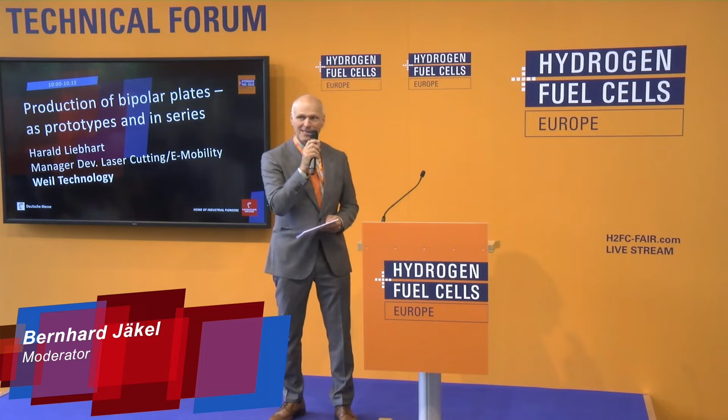And we have a whole bunch of interesting cutting-edge presentations of the newest technology. And today, the first speaker will talk about the production of bipolar plates as prototypes and in series. He's manager of development, laser cutting, and e-mobility. Please welcome with a great applause, Harald Liebhart.

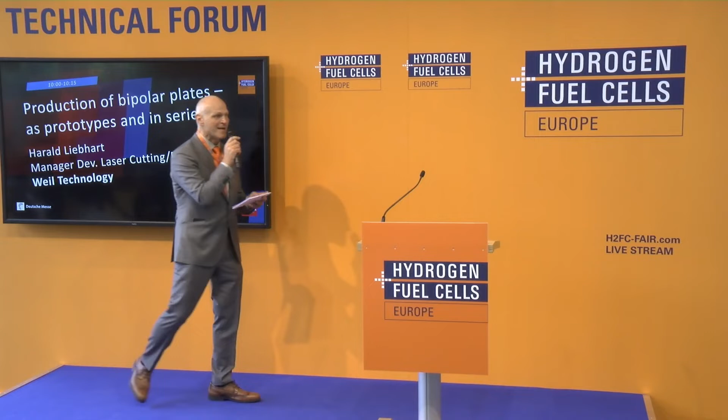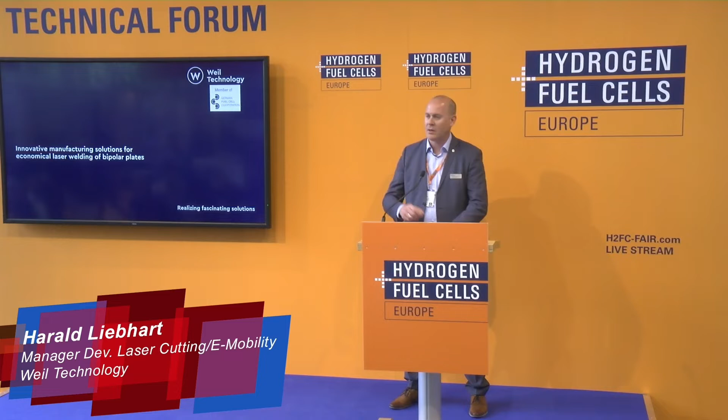Morning. So, hello and welcome also from my side to today's presentation of a manufacturing solution for metallic bipolar plates welding. My name is Harald Liebhart. I'm at Weil Technology responsible for development of laser cutting technology and e-mobility products.

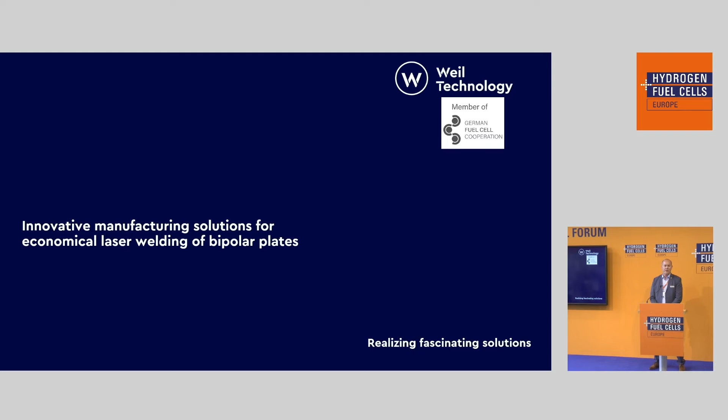Let me shortly introduce you the company Weil Technology. We are a family-run company founded in 1987 by our CEO, Mr. Wolfgang Weil. We are located in Mülheim, in the very south of Germany, about 40 kilometers south of Freiburg. We have two offices, one in Detroit and one in Shanghai, both with sales and service departments. And we have a daughter company, Schal Technology, which provides the servo press technology for us. This is located close to Stuttgart.

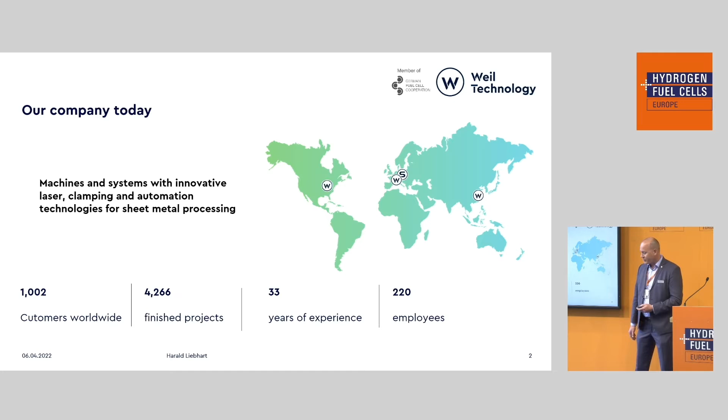With about 220 employees, we have about 1,000 customers worldwide and more than 4,000 machine installations. So, in summary, we have more than 30 years experience in laser processing technology, especially in laser welding and laser cutting technologies. Today, we want to talk about the solution for laser welding of metallic bipolar plates. And here we are in cooperation with the companies Von Ardenne and Zeltwanger as a member of the German Fuel Cell Cooperation.

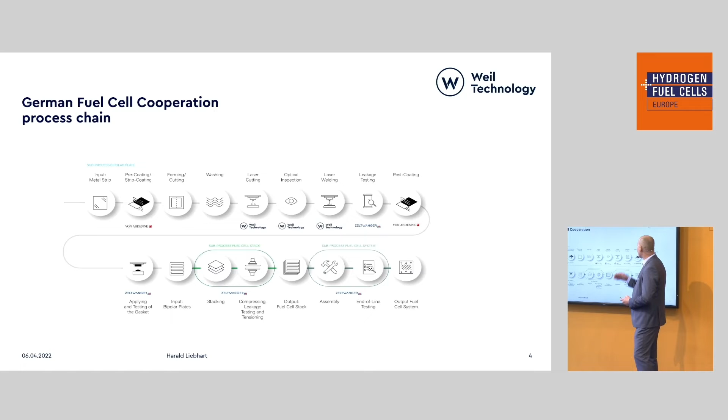Shown here on the slide is the complete process chain provided by the German Fuel Cell Cooperation. All companies with their core competence inside, with their modules, and we are located here mainly with the laser cutting technology and the laser welding technology. Today we want to talk about the laser welding. We at Weil Technology started early research on welding technology for metallic bipolar plates already in 2018, at that time with Cartesian guided optics, which changed, due to the high output needs of today's production lines, to remote welding technology.

So today we're talking about welding speeds of 1,000 millimeters per second, which is required for the output of such a production line. And as you can see in the diagram, a spot diameter of more than 70 micrometers is required to get a feed reserve of about 20%, which is recommended for our machine technologies. With this very big spot diameter, you have a big thermal impact on the plate during the welding process, and this results in a distortion of the surface of the plate, which is, of course, not good for your product quality.

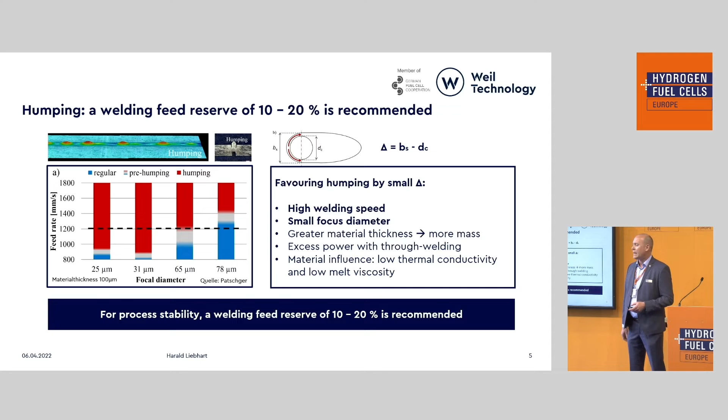That's why we at Weil Technology developed the dual Scanfield technology, which gives us the opportunity to reduce the single speed of each scanner system and use a very small spot diameter to reduce the thermal impact to the plate during welding. The dual Scanfield technology works with two scanners processing time-parallel on one plate with a small overlapping area, and this gives us the additional benefit that we can increase our processing window.

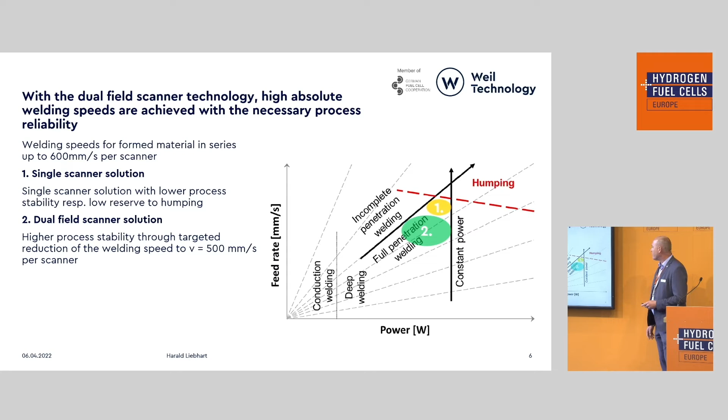Here you see a comparison between a single scanner solution for an output of 1,000 millimeters per second and our dual Scanfield solution with the same final output. As you can see, we more than doubled the process stability with that solution. Oops, sorry, this was one slide too far. Also here you can see, specifically for our optical setup, the process window is very high. So in summary, we achieved a very high process stability with this technology, more than 20% feed reserve for the process, and low heat impact to the material during welding based on a very small spot diameter.

Additionally, there are more benefits coming out of this solution. One of them is the heat management we can offer you. That works with the contour path direction, which we can now orientate symmetrically, starting welding from the inside of the plate symmetrically to the outside with the contour distribution. This also makes the thermal impact symmetric and gives you, as a result, a very flat plate at the end. Especially relevant for material thicknesses of less than 100 micrometers, where the heat impact is more critical.

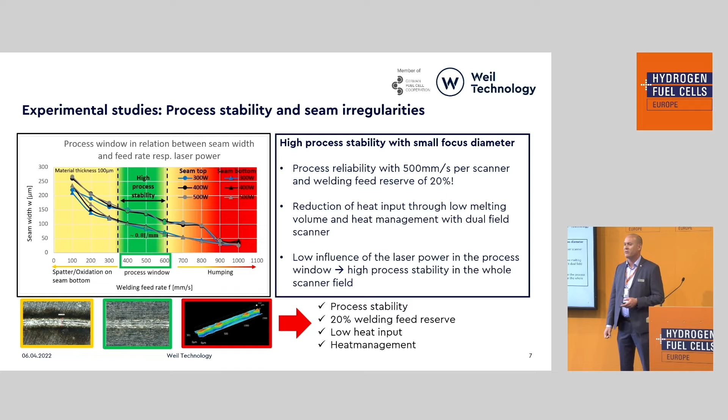Our processing area here in our system is 500 by 350 millimeters for the maximum plate dimension for a single load. For a double load or double mold technology, we are limited to plate dimensions of 500 by 165 millimeters.

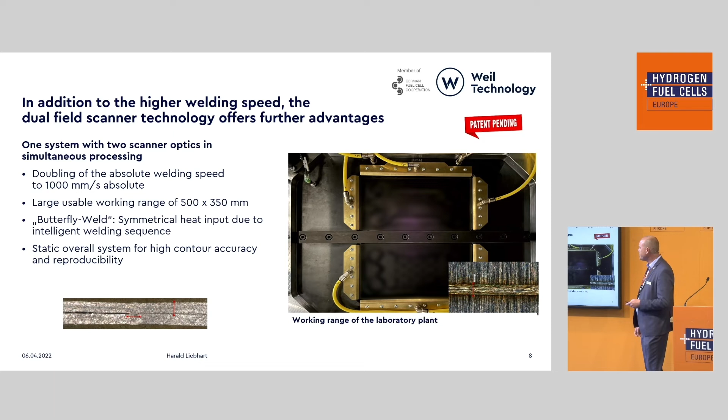The next big challenge in laser welding of bipolar plates is, of course, the clamping and the tooling technology. Here the requirements are extremely high. That means we're talking about a zero gap condition, less than 10 micrometers. We need a completely equalized distribution of the force all over the tooling. And we need a prismatic compensation of the tooling. And of course, we need a very fast clamping and unclamping time.

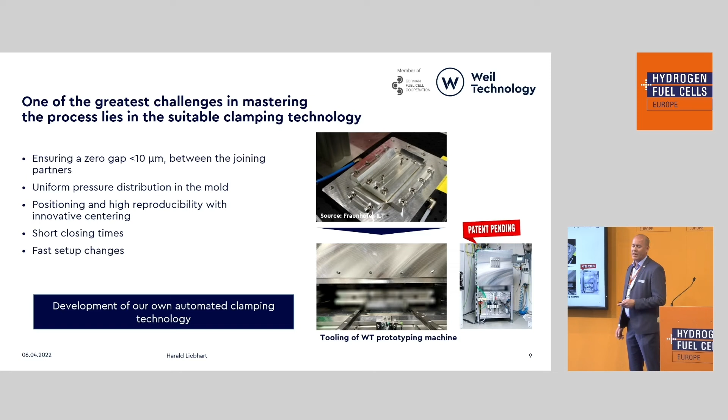All these challenges are already managed by Weil Technology in our prototype module, which is already patent pending, and which is implemented with automated clamping technology and installed in our lab in Müllheim at Weil Technology.

Coming to the industrial production solution for the PEM cells. Here we are based on a 4-station rotary table with 2 welding modules, each of them equipped with dual Scanfield technology and automated clamping technology. For the raw material feeding, we use precision magazine trays, which are supported by vertical magazine exchangers, which gives you the autonomy of your system and can be enlarged as your requirements are.

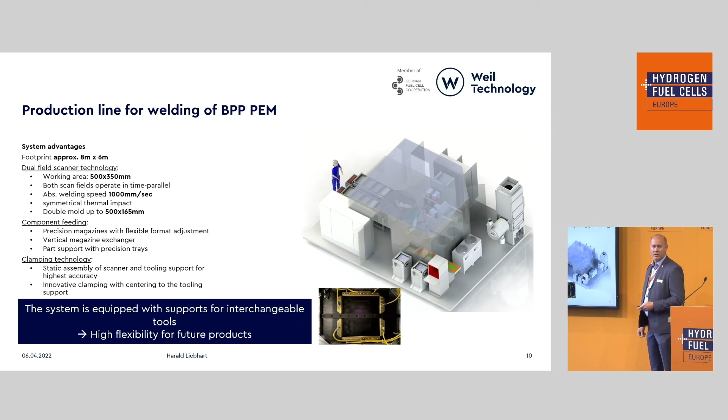The working range, as explained before, is 500 by 350 millimeters for maximum dimension of single loading, 500 by 165 for double mold technology for high output, and an absolute welding speed per single module of 1000 millimeters per second. All our tooling supports are prepared and equipped for interchangeable toolings, so you are safe for the future. We are very flexible on that side and can use it for future products.

Coming to the SOFC solution of this machine, it's very similar. Here we're talking about multi-layers at the SOFC plates. And so we are able to stack up to 4 components, doesn't matter if it's plates or spacers between. And so we have, of course, 4 loading supports here. The welding technology itself is the same, but we additionally use active toolings to do a pre-stacking with the right accuracy inside these toolings before we run them into the welding modules. From the outside, it's similar.

The only thing that is really special here, we also did research, of course, on the welding technology of these plates, and the difference compared to the PEM cells is that we have a material thickness of 300 to 500 micrometers, and we need a different welding technology. So we use an oscillating welding technology in that case, and this limits our welding speed here to 320 millimeters per second per module.

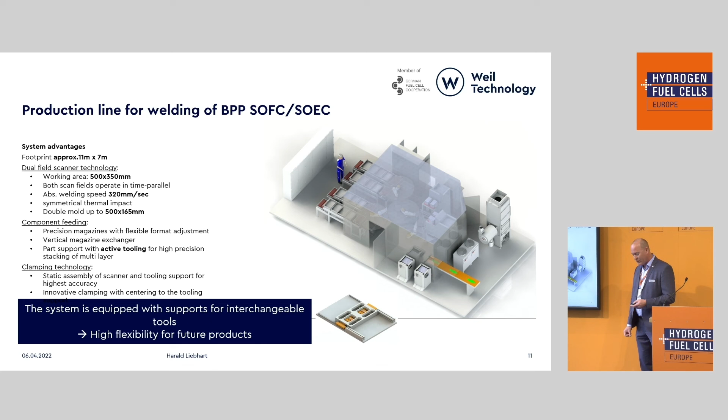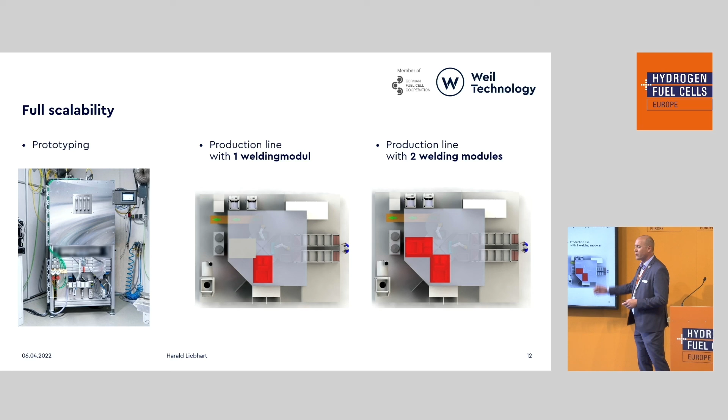Coming to the scalability of the system, we are starting with the prototype module, which can be added with automated loading and unloading, a series production line with only 1 module, or scale up to the full 2-module version. Typically, for example, for 3-meter contour path lengths on a plate, we're talking with the one welding station of an output of about 1.5 to 1.8 million plates per year, and here, of course, the double of it.

Finally, all the slides I've shown you before are not only a preview. We already have the hardware in-house in our lab in Müllheim, and are able to do prototyping for you there with the complete series equipment for the series module, with the dual Scanfield technology, with the automated clamping device, and of course we assist you in pre-engineering of your plate design, especially for optimization of the clamping and the welding technology. Additionally, we also have the cutting technology for the bipolar plates in-house, so there too we can provide prototyping for you.

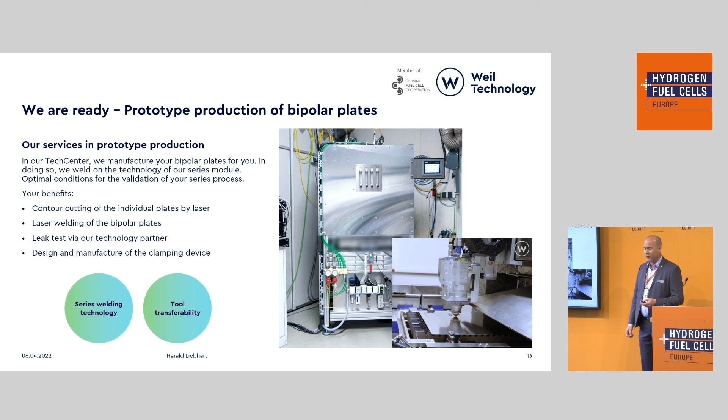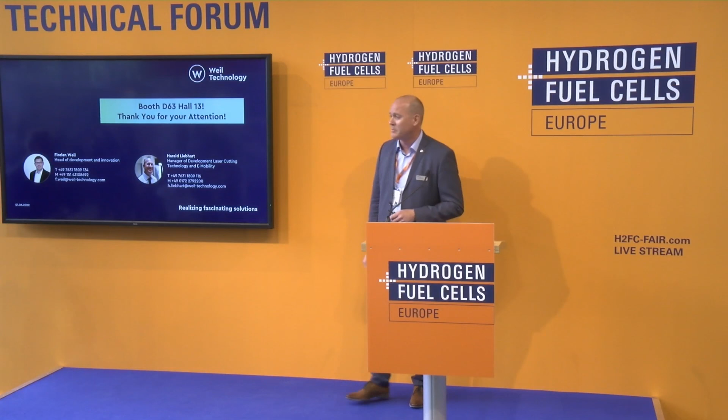Thank you. Thanks a lot, Harald Liebhart. You managed the problem of getting a 30-minute presentation into 10 or 12 minutes. Thanks a lot.